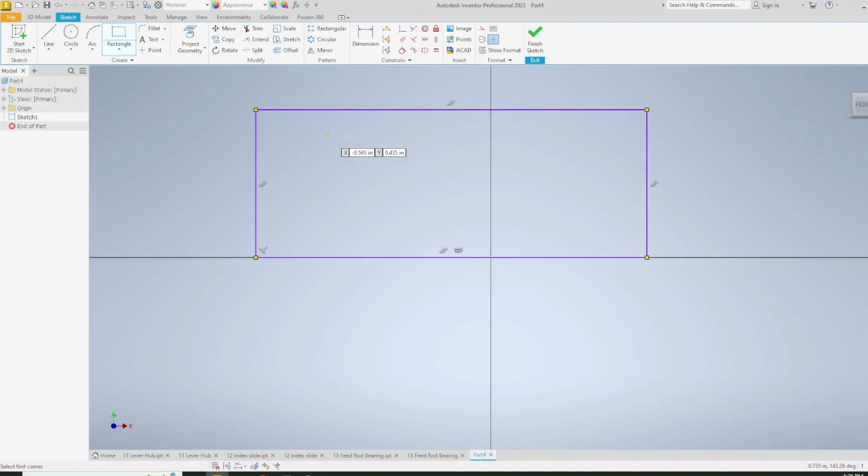So this part we're just going to start on the XY plane, and it should be very straightforward. I'm going to make some rectangles that look something like this, a rectangle on top and then a rectangle right here. I'm going to line up my rectangles together by center point, and then make sure that this lines up on the center line right here.

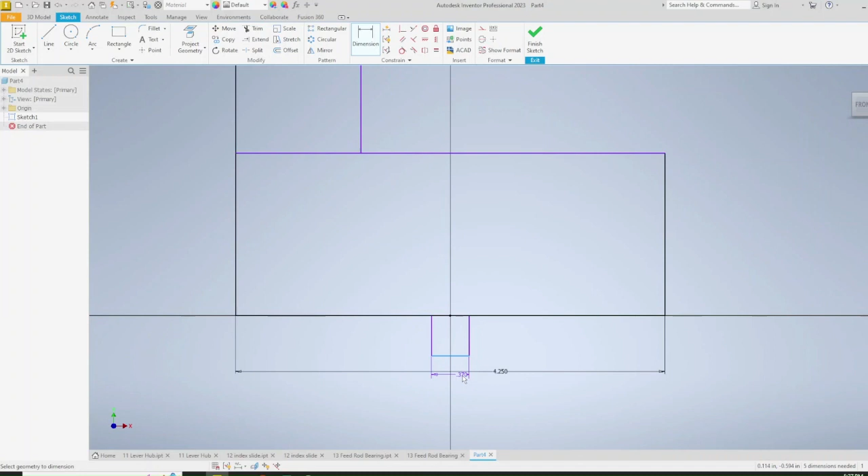And then I'm going to add dimensions to make sure that everything is in the right location. My overall dimension from left to right is 4 inches and 4.25 inches. And then this little nub that sticks out, that's 0.749, 0.12.

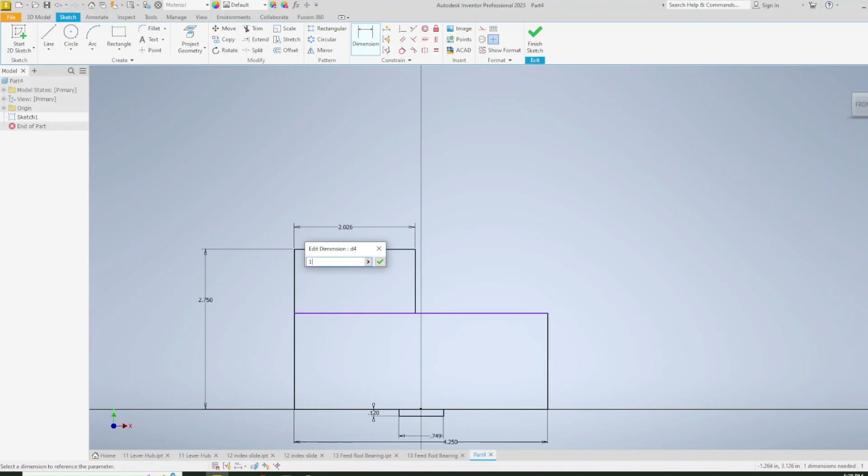All right, and then its overall height from top to bottom is 2.75. And this section here, we're just going to go ahead and leave this like so, and I'll tell you why. We're going to add this to be 1.75, and the height right here, we're just going to kind of leave it a little bit large, and the reason why is because we're going to be cutting out all of that in a little bit.

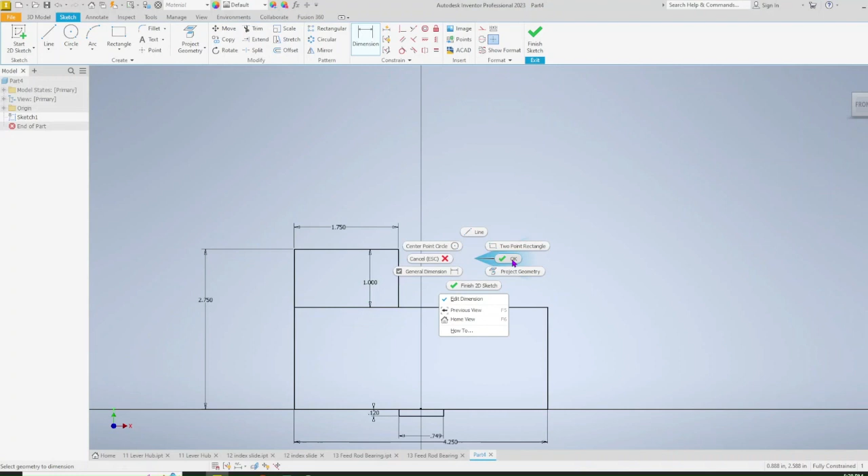But let's go ahead real quick just to make sure that we're okay and we're not freaking out. Let's go ahead and put that in at 1. All right, so that's all of the dimensions that we need.

Go ahead and extrude this by 1.75. And we're going to extrude this by 1.75 in both directions. It's symmetrical, and I'll explain that in the next sketch.

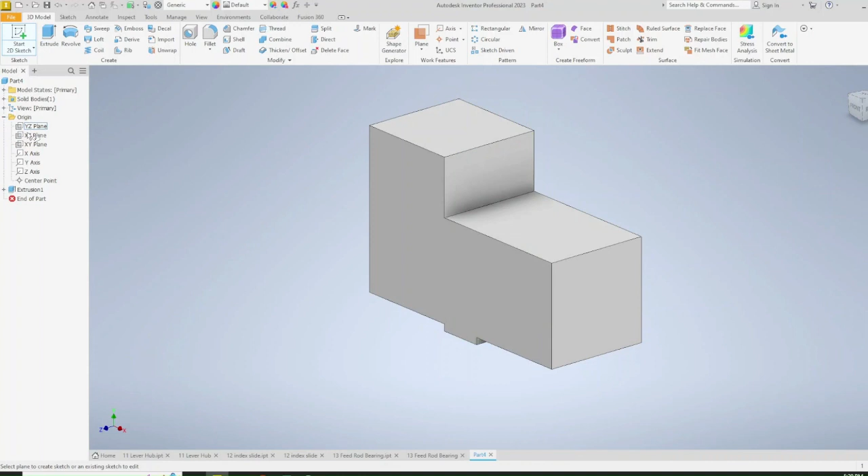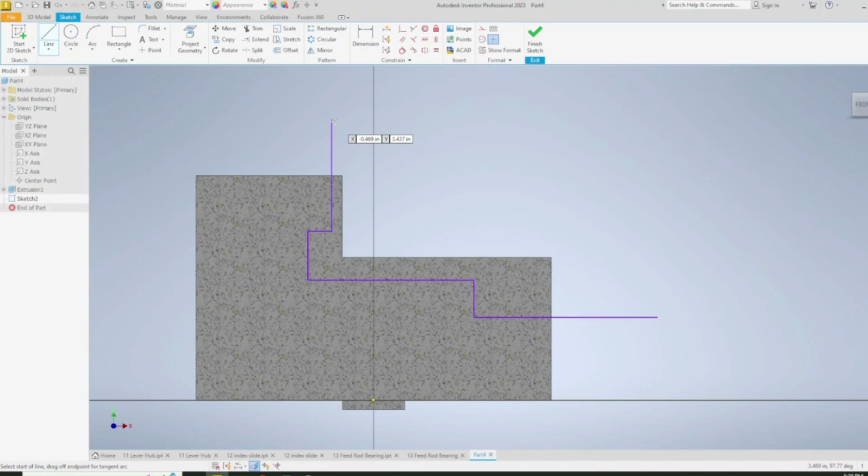So we're going to create a sketch on the XY plane, and I'm going to slice graphics and draw some lines. The first line that I'm going to draw, I'm going to draw it straight down, over, down, back like this, down and out. Okay, actually I'm going to complete this shape like this.

All right, so what we're going to be doing is revolving our cutout. So the dimensions that I've given you, especially this 1.75 right here, that is important. I'm going to line up this line with this, which gives me my overall position of where this center line is. So the center line is going to be 1.75 inches away from this surface right here, which is 1.75, and I'll go ahead and put that in right there.

Oh, it didn't do it. 1.75 away from this edge. And so once you have that, we can go ahead and continue dimensioning. I'm actually going to project my geometry because I didn't do that at the beginning, and I'm going to add the remaining dimensions that we're missing.

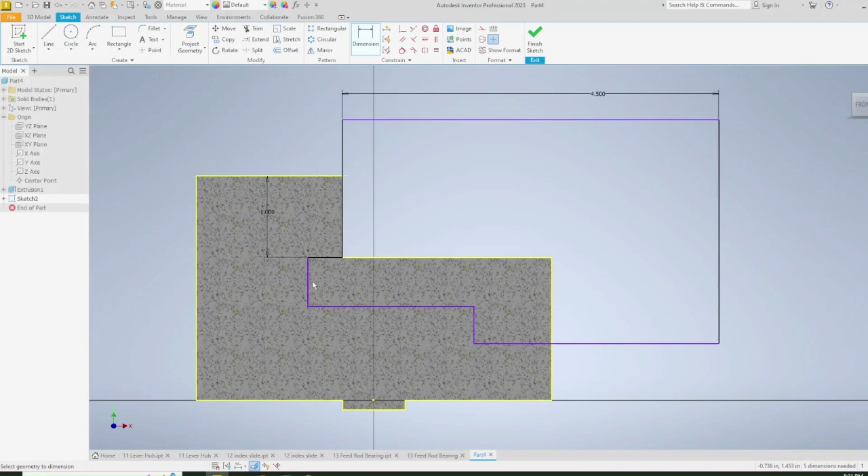This is 1. This right here is 0.31. And the distance from here to here is 4.69, so it extends into the part. This cutout here is also 0.31. And this is 3 inches.

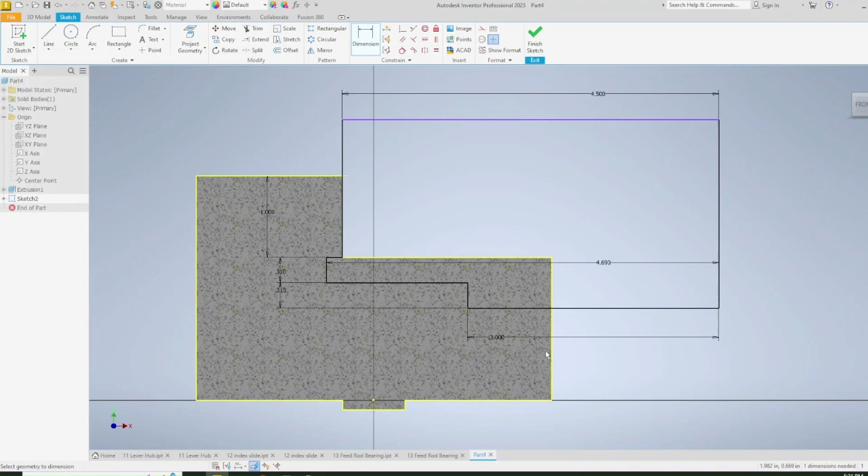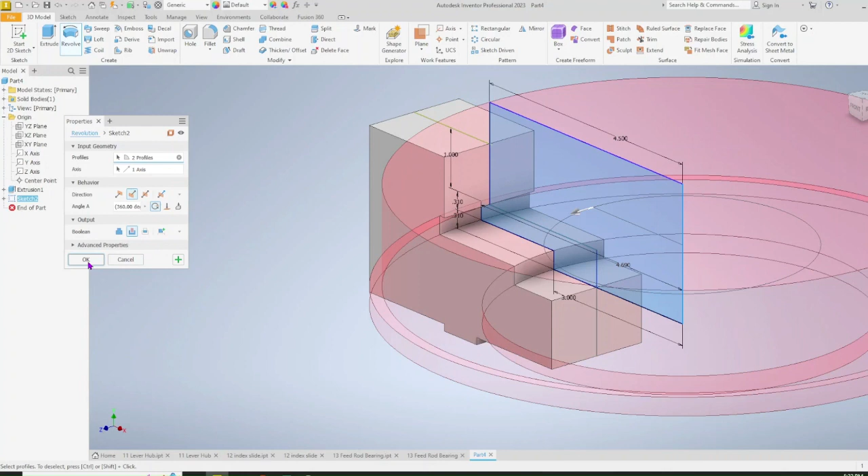So once you have all of this, go ahead and finish your sketch. What we are doing is revolving our entire sketch that we created around the axis of this line. This is acting as our axis, and we're cutting it out. So once we cut it out, we get the general shape of what we're looking for.

The next thing that we need to add is this chamfer over here. Now what we do know about this chamfer is that it's not at a 45-degree angle, it is actually at a 30-degree angle, and it has a distance of 0.62.

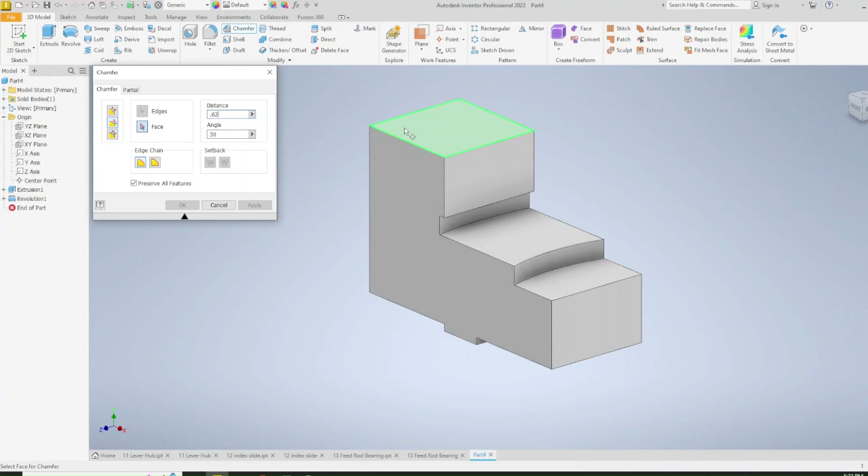Now the way Inventor works is it wants to know which angle or which surface we are measuring the angle from. We're measuring the angle from this surface, and we're going to cut out this corner. Once you have selected that surface and that corner, you can go ahead and say OK.

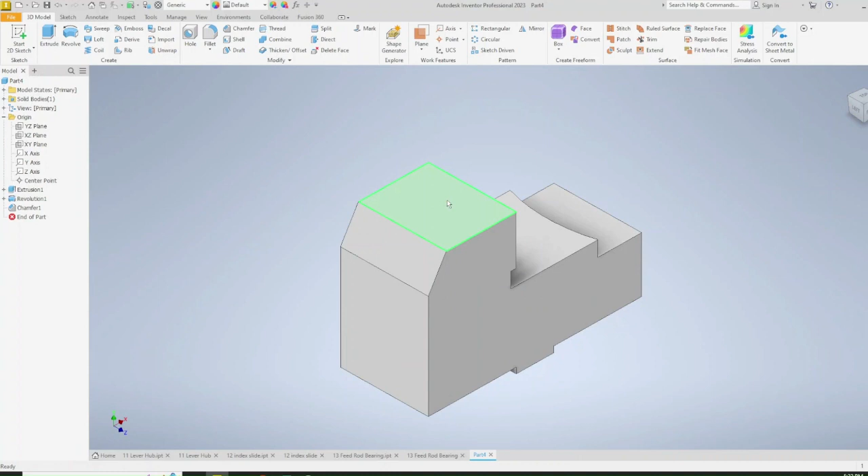And now we can add some circles or holes right here.

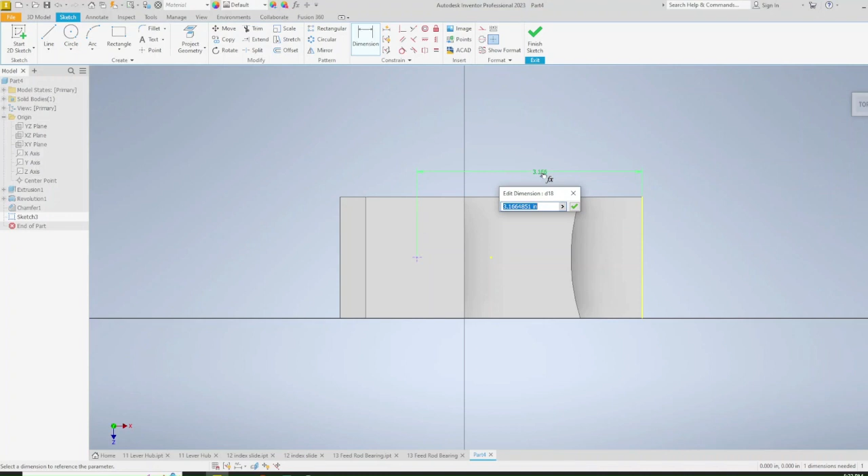I'm going to go ahead and add a point, and make sure this point is... let me rotate this so we're looking at it like this. This point is being measured from our right hand side, so we're going to select this line, and this is 2.5 plus 0.75, which gives us our correct placement, located right in the middle. I'm going to use my horizontal constraint and lock that in.

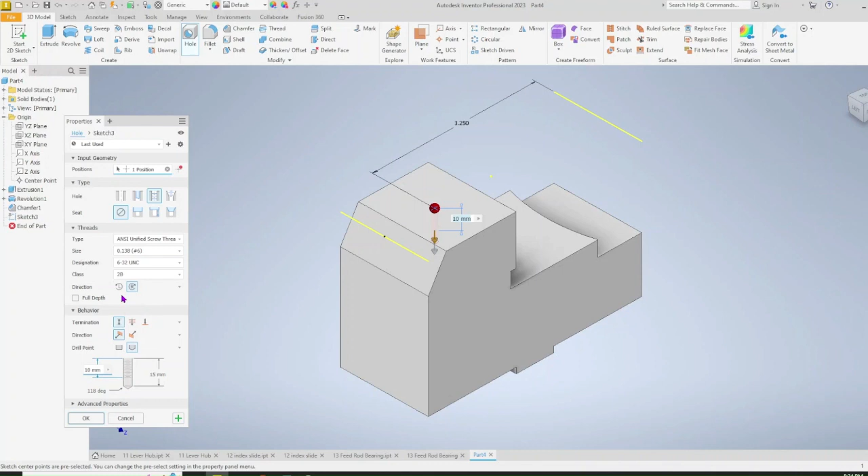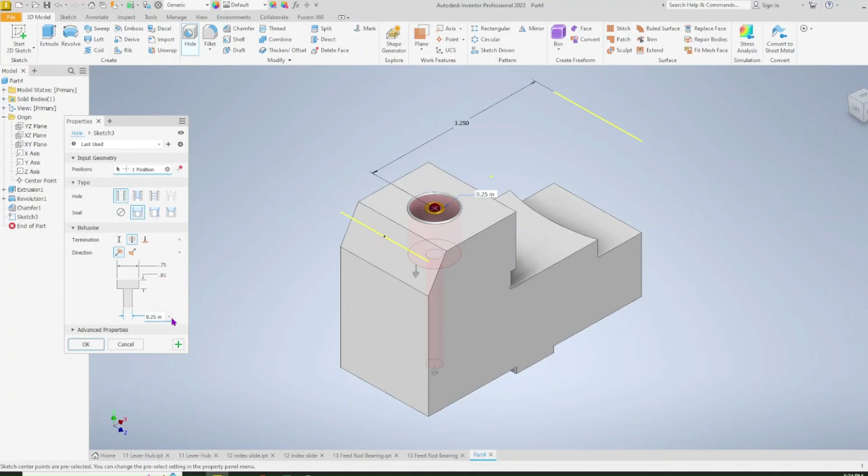Once I have that, I'm going to go to hole. This counterbore is a regular simple hole with a counterbore seat. It goes through the entire part, and the size of this counterbore is 0.75. The depth of it is 0.81, and the actual drilled hole is 0.25. Once you have that, go ahead and say OK, and there we go.

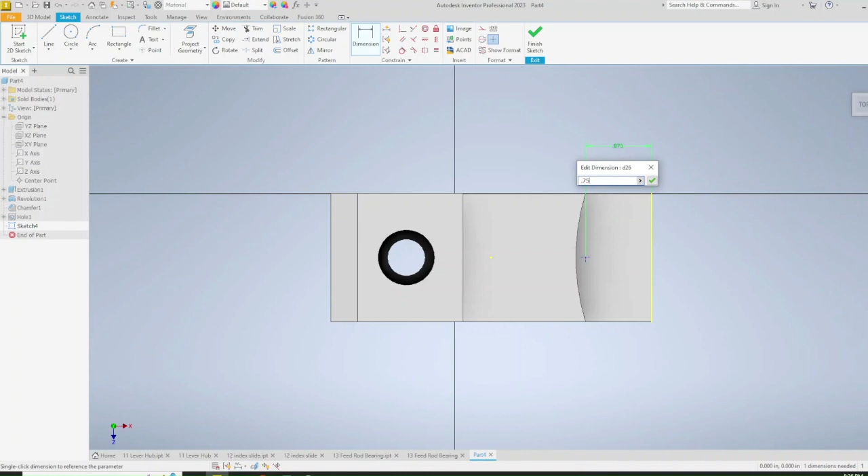The second hole, which happens on this surface, actually starts on this surface. So I'm going to create a sketch on that face and put a point right here, then dimension that. That's 0.75 away from the right hand edge. I'm going to line it up horizontally with this point, and once I have that, I can go to hole, and Inventor automatically puts that hole in using the information from the previous hole. So go ahead and say OK.

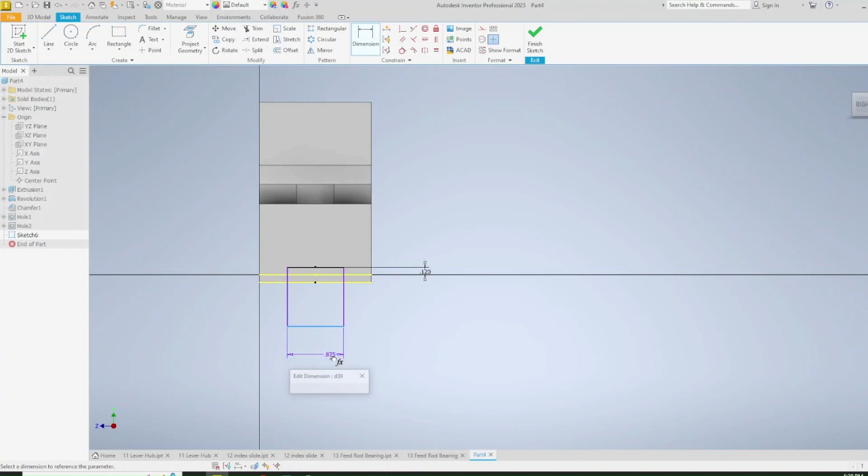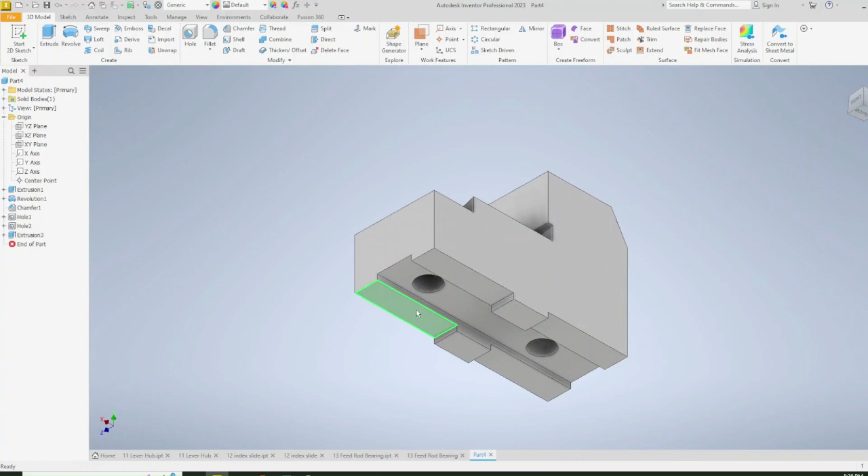Go ahead and finish your sketch. Go to extrude, select everything. We are cutting all the way through this part, and you can see how it's cutting everything off. If we look at it from the right or from below, you can see that it's properly placed. Go ahead and save this part.

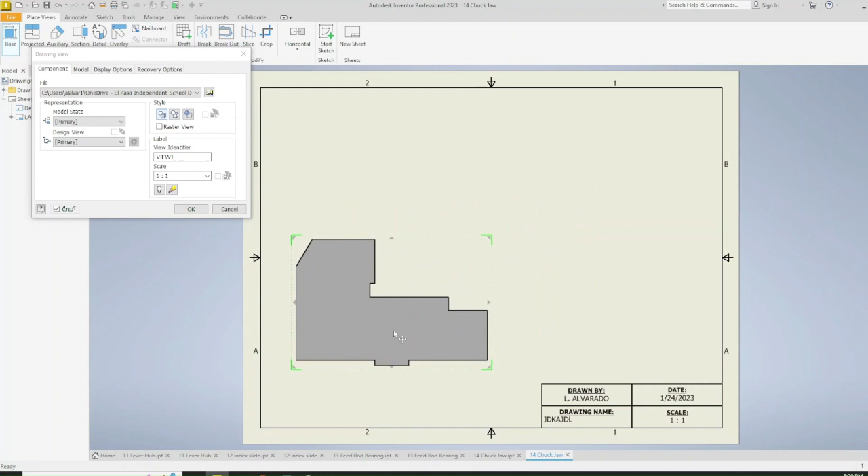Placing this view at a scale of 1 to 1 is perfect. It will fit on this just right, but it might be a little bit tight with all of the dimensions that are necessary. So let's go ahead and double click on that and change it to 3/4.

This is in the regular imperial system, so we don't need to add or change any of the document settings. We can go straight to adding center lines and centerline bisectors. All of these are extremely important, and make sure you guys always add them, because if anyone ever creates this in real life, they need to know that these are circular cylindrical holes going through the entire part.

Once you have that, it is now your responsibility to go ahead and add the remaining dimensions. Make sure that you actually count how many dimensions there are on this drawing - there are quite a few, so make sure you add them correctly.